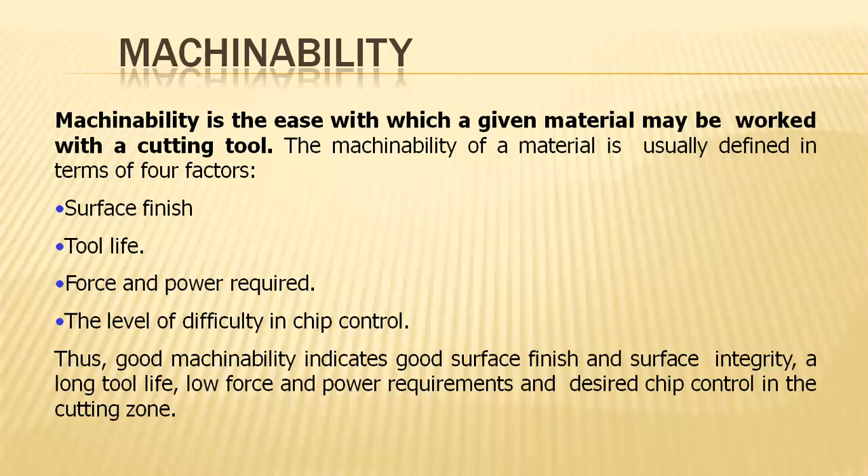But if these four parameters are considered to indicate good machinability, this leads to high surface finish and integrity, an increase in tool life, less force being sufficient for performing the machining operations, and lower power requirements. Coming to the index of this machinability.

Due to the complex nature of cutting operations, it's very difficult to have a relationship that quantitatively defines it for a particular material, even relating to perfect dimensional accuracy with respect to the input parameters given and compared with the standard dimensions existing in historical records.

Hence, the machinability rating of a material leads to quantifying the machinability of various materials, where Km is equal to V60 by V60R. V60 is the cutting speed of the target material that gives a tool life of 60 minutes, and V60R is the same for the reference material.

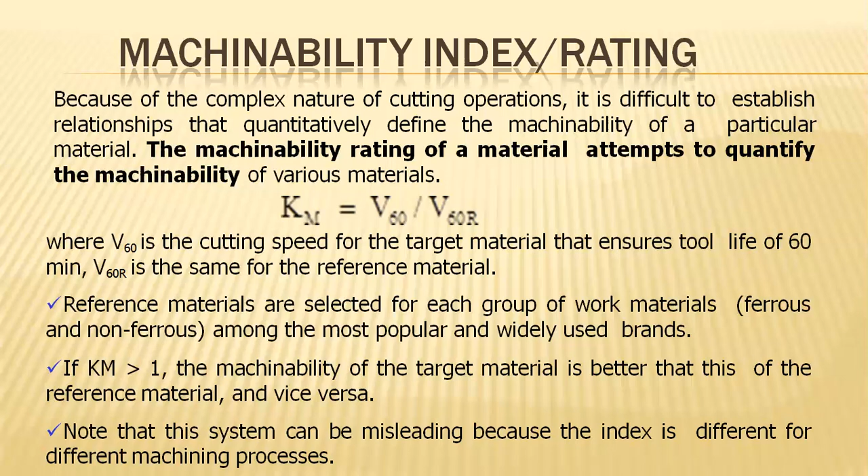Coming to an example, if the reference material is AISI 1112 steel with an index of 1, it specifies that machining the steel with parameters of cutting speed, feed, and depth of cut, the cutting speed maintained is 0.5 meters per second, giving a tool life of 60 minutes. Therefore, V60R is 0.5 meters per second.

For austenitic 302 SS steel, the machinability index Km is equal to 0.23 by 0.5, where 0.23 means the tool life of 60 minutes is reached at 0.23 meters per second. So the machinability rating, related to the material removed per second by that SS steel, is based on 0.23.

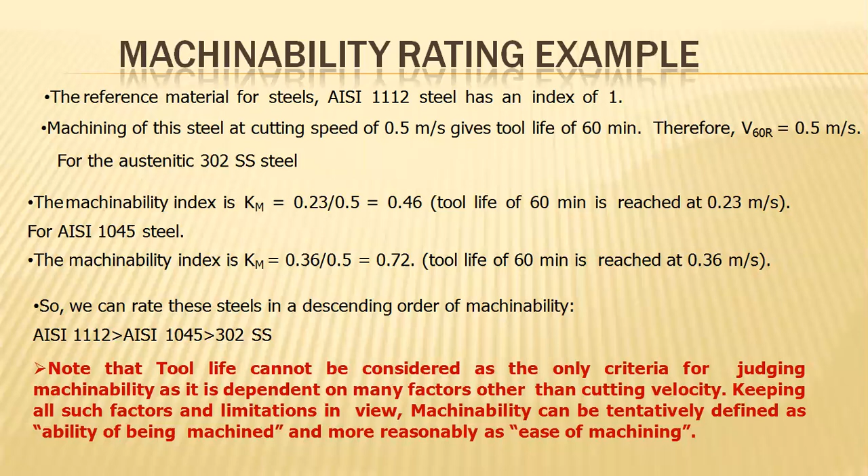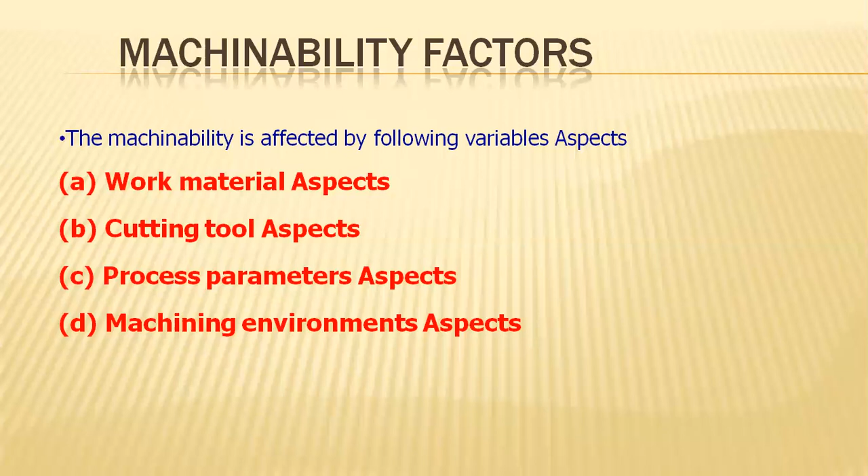Coming to the machinability factors, the factors which are considered for the removing of the material or the machinability. There are various parameters because of various factors. First one is the work material aspects. Secondly, the cutting tool aspects. Third one is the process parameters aspects and machining environment aspects. And in detail, we'll be looking at them one by one.

Coming to the point of the work material aspects, the properties which govern the machinability are listed below. First one, the nature of the material, whether it is a brittle material or a ductile material, which leads to nominally the machining or force applied that will be confined to high rates, high strength to weight ratio, and the microstructure, that is nothing but the statistical or structural data of the material and its coarse,

and even the tensile strengths and the yield stresses, hardness, hot strength and hardness, work hardenability, thermal conductivity based upon the frictional forces which are created between the tool and the work part. The thermal stresses will be produced. So the conductivity leads to a formation of those thermal stresses, leading to a temperature increment at the frictional area.

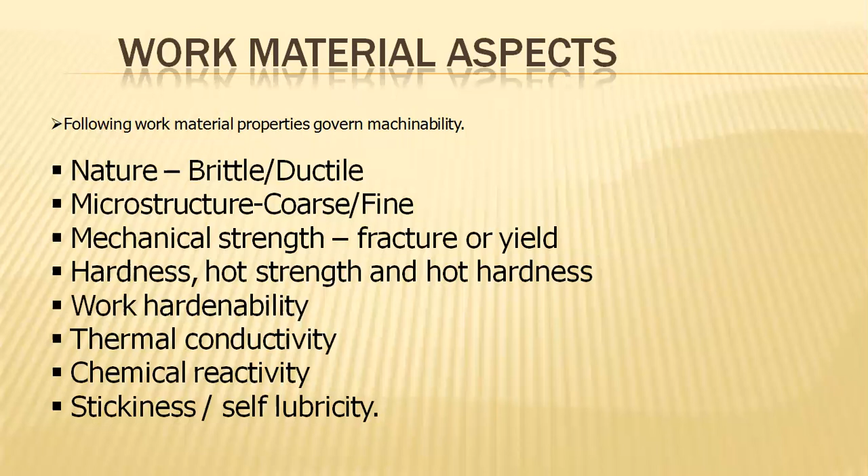So the stickiness causes high friction or high viscous generation between the tool and the work part in the process. So these are the parameters governing the machinability over the work material aspects. Let us discuss one by one in detail. Nature, brittle or ductile.

Brittle materials are very easy to machine, with easy separation of the chip because of their less tensile strength and less frictional force generation and heating at the rake surface, at the mating point of the tool tip and the work part. Hence, it leads to a formation of mini chips over the MRR process.

Even these ductile materials like mild steel produce high surface finishing but the BUE. If at all this BUE is being formed, our surface finish will be deteriorating. That is nothing but rough surface finishing will be achieved.

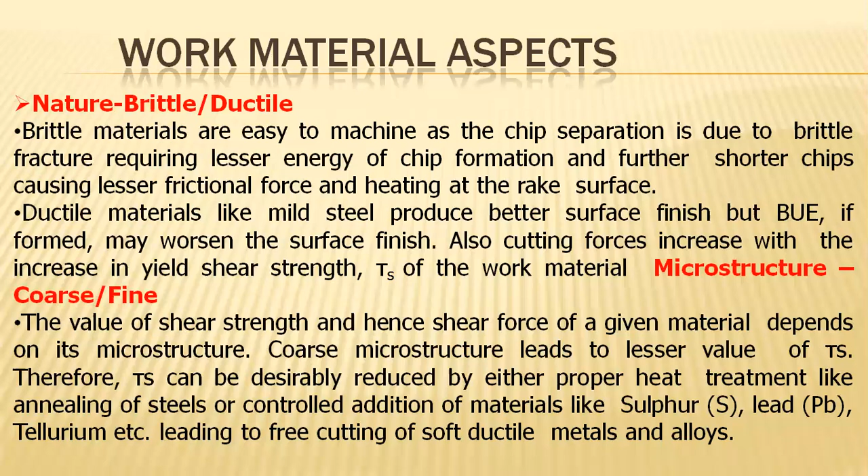Coming to the point of hardness, hardened materials are obviously very difficult to machine; increasing the cutting forces will lead to damage of the tools and even the surface finish of the objects. But usually we increase the cutting velocity, and the forces will decrease to some extent. Upon increasing the cutting velocity, the cutting forces decrease, and hence there will be a reduction in the TS and also the chip thickness. And thermal stresses will also decrease.

Thermal stresses will also decrease due to the softening of the work material, particularly at the shear zones, because of these elevated temperatures. Hence, because of these increasing temperatures and cutting velocities, even when working on hot, strong, and hardest materials such as nickel- and titanium-based super alloys, work hardenable high manganese steels, and alloy materials such as nickel, manganese, titanium, and magnesium alloy combinations, it will be a bit difficult and can be machined only by increasing the cutting forces. Obviously, it leads to high frictional forces and increases the temperature and cutting velocity.

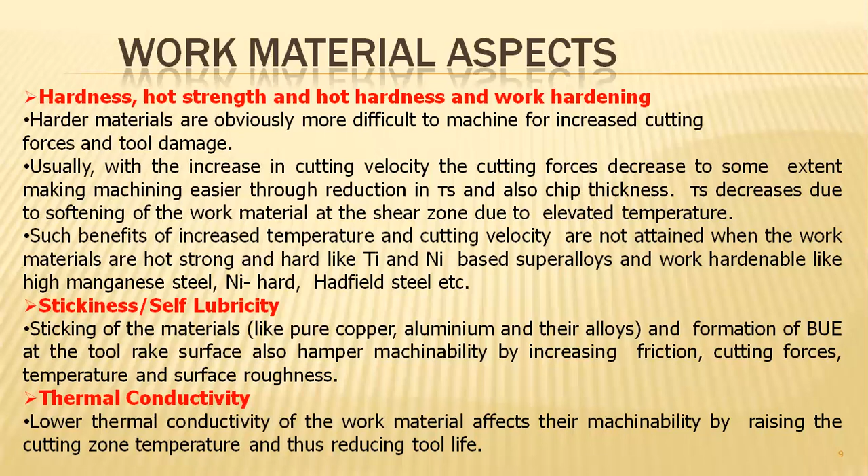Coming to the point of stickiness or self-lubricity, sticking of the materials and the formation of built-up edges on the tool surface hamper the machinability by increasing the frictional forces, cutting forces and even the temperatures. Surface roughness will also increase. Coming to thermal conductivity, when it is low in the work material, it raises the cutting zone temperature, and hence it affects the tool life.

Coming to the cutting tool aspects. So we have discussed the work part material aspects, and now proceeding towards the cutting tool aspects. The tool life is determined mainly by the tool material itself, which influences the cutting forces and the temperature, along with the accuracy and finish of the machined surface. Hence, previously, for a medium range of objects, HSS materials were normally utilized to cope with elevated temperatures. Coatings such as ceramic coatings and sintered carbide are applied over the tip of the tools to increase tool life. Hence, properties such as strength, hardness, toughness, wear resistance, and thermal conductivity play a major role in the machinability characteristics.

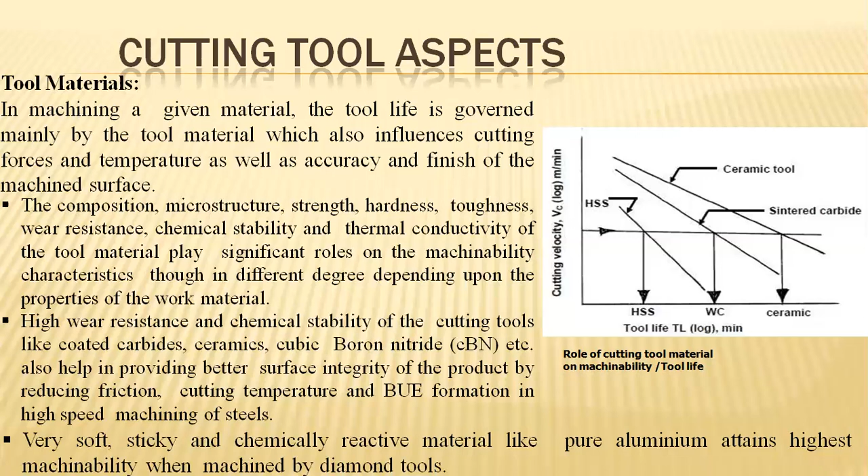This machinability is affected by geometry elements such as rake angles, clearance angles, and the nose radius with respect to the tool and the work part materials. When the cutting force is initiated, the performance of the tool with respect to the angle gamma is that an increase in the rake angle reduces the cutting forces. So upon increasing the rake angle, the cutting forces drop and the chip load will be elevated, while decreasing the strength at the tool tip. And this leads to high frictional resistance during machining, and the tool life will decrease.

And inadequate clearance angles reduce the tool life. This is one of the defects in the cutting tool aspects, affecting the surface finish by tool rubbing, and too large a clearance will also result in a reduction of tool strength and even tool life. If the strength is decreased, it directly affects the life of the tool.

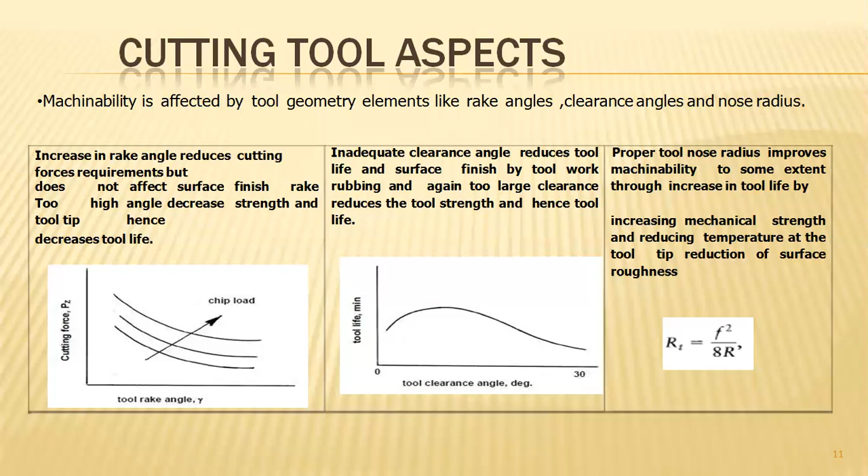If a proper nose radius is maintained, it will increase the machinability, and through that, the life of the tool will also increase by increasing its mechanical properties such as strength and stiffness, which resist the temperature generated by the frictional forces produced at the tip. That also reduces the surface roughness, and hence we achieve a good surface finish under machining conditions.

Coming to the process parameters, the proper selection of cutting velocity, feed, speed, and depth of cut will nominally result in good machinability characteristics. Even the MRR condition will be improved, and we will achieve better dimensional accuracies for the work part.

Among these parameters, the depth of cut plays the least significant role, because almost all nominal depth related to the cutting process will be provided by the external offset to the tool. When the cutting velocity is increased, it leads to a reduction in the tool life, but it reduces the cutting forces. Automatically, it results in better surface finish through favorable chip-tool interaction.

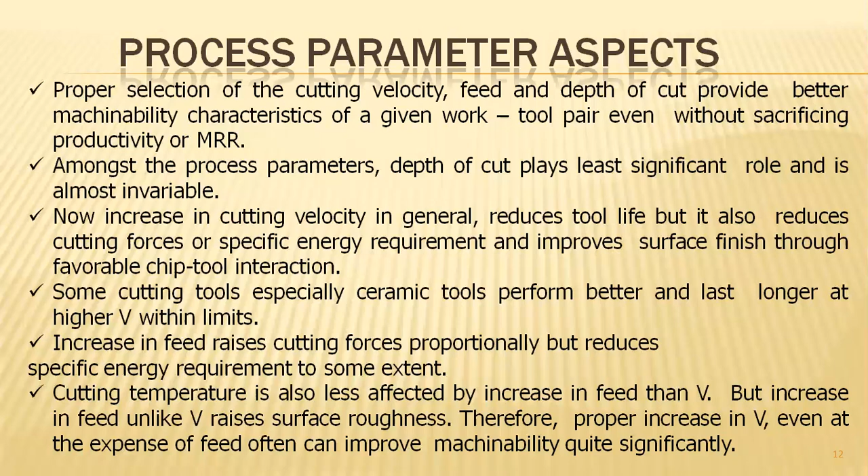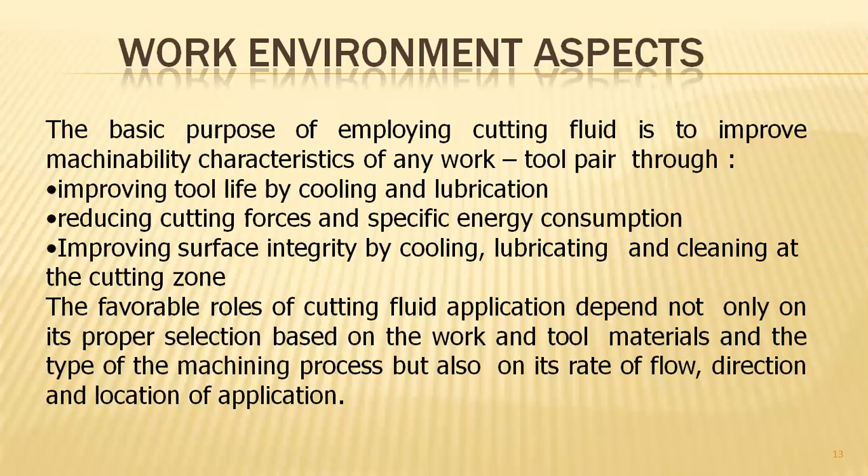Coming to the work environment aspects, environment is also one of the basic phenomena that need to be characterized in the machining process, as seasonal variations lead to variations in machinability properties. The main purpose of employing cutting fluids is to improve the machinability characteristics by providing coolants, or lubricants. The tool life will increase, and surface integrity will also improve at the cutting zone, and hence the tool life and work part surface finish will be very favorable, leading to good dimensions in the machining process.

Coming to the favorable ways of improving machinability, we have many shortcomings related to different fields, either work part related, tool related, material selection related, or operational parameters related. So how to compensate for this? The machinability of the work materials can be improved without sacrificing productivity if we follow some of the minute parameters as follows.

First is a favorable change in the composition, microstructure, or even the mechanical properties, by combining the amount of additive materials in the work and appropriate heat treatment for strengthening of the materials. Hence, better mechanical properties will be achieved for the particular material or alloy we are utilizing. Second, the proper selection and use of cutting tool material and geometry, depending upon the work material, the type of material to be machined, and the machinability criteria to be considered.

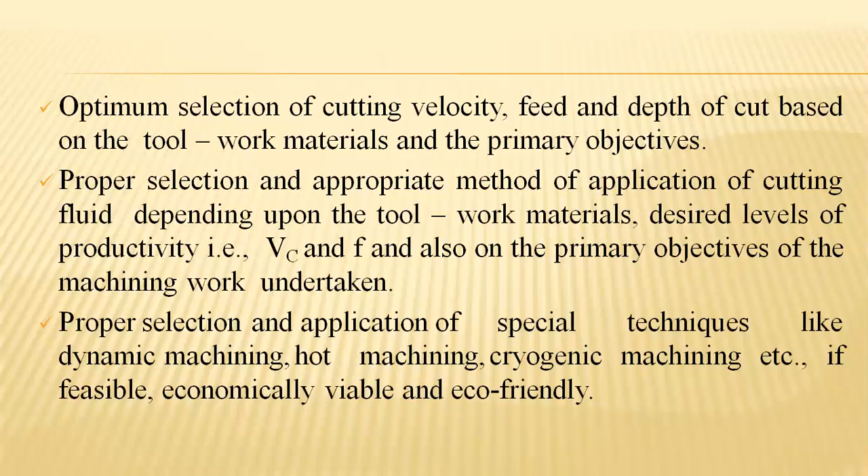And in dynamic conditions, variations in environmental aspects such as hot machining and cryogenic processes need to be altered to be eco-friendly. These are the steps to be followed for getting better accuracies in machinability. By following those conditions, machinability on ferrous and non-ferrous metals leads to some points that we'll be discussing in the next class.